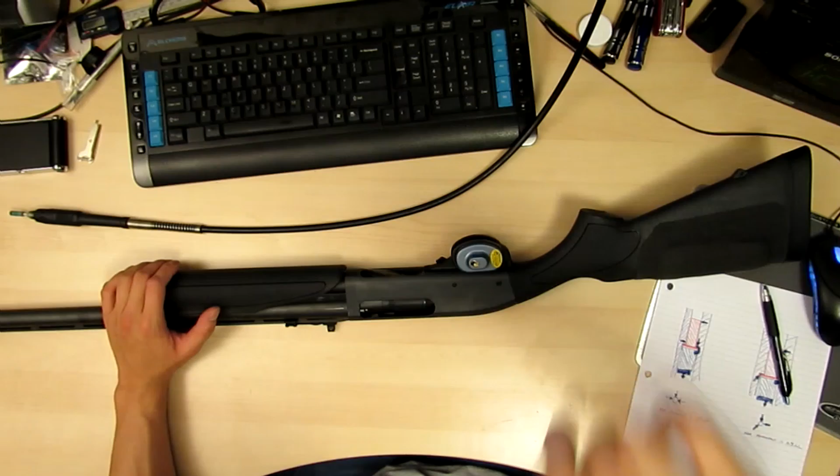So if you're watching this video, you probably want to find out how to fix your Remington 870 pump action shotgun from jamming. After a shot, you don't need to push this, but you should be able to pull the shell out. But sometimes it'll get stuck and you'll have to reef on it a bit, you'll have to jiggle it around, or you'll take the butt stock and just hang on to the grip here and just smash the butt into the ground. And that'll loosen it up. And I'm going to tell you why that occurs and how you can fix it.

If you've got a problem with a jamming 870, just take an empty shell, squeeze it into 4 corners, throw that in there, and it should not be able to come out. If that's your problem, all you have to do is sand the other side down and then polish it off, and it should be able to open up even if you've got a pretty messed up shell.

So I've narrowed the problem down to a little bump, manufacturing defect I guess you would call it, but a bump that's left there after poor machining of the breech right outside the chamber. And what that causes is after you've fired a round and you've had a shell expansion, that's just the plastic part expanding out here, not the brass rim. The shell expands, catches onto the edges here, and causes the rim to push up against this little bump. That's why it doesn't happen every time.

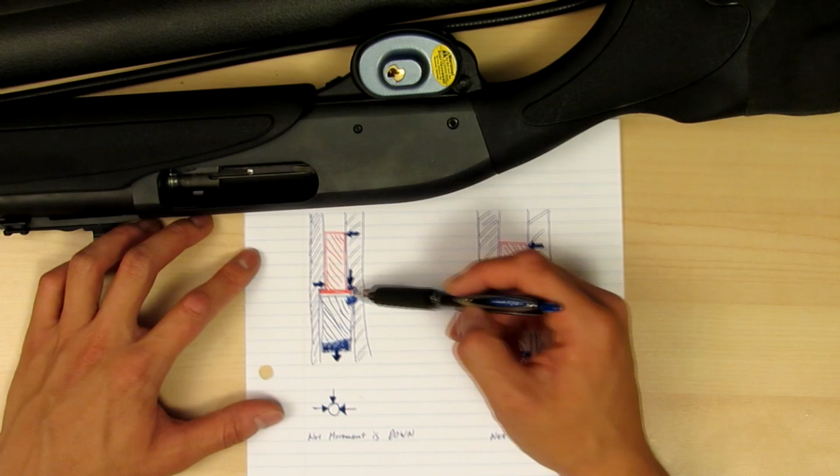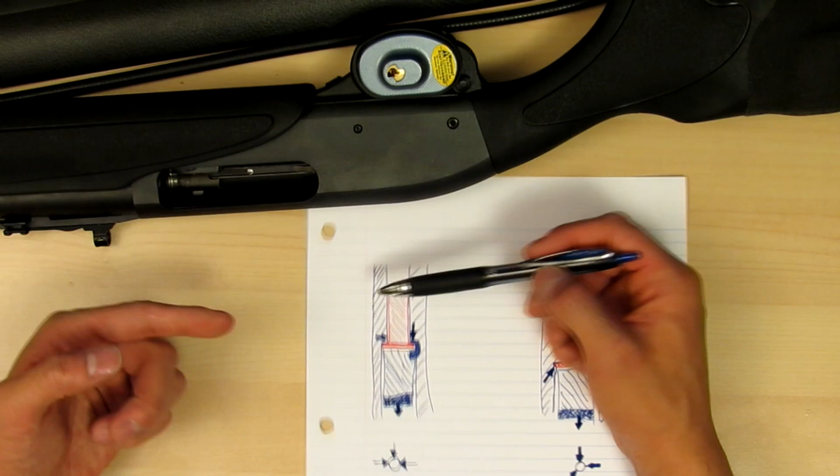You've got one extractor on one side of the rim, you pull on that, and the only forces that should occur are this top edge pushes in and this bottom edge pushes in this way. So there's no forces keeping it from sliding out, so it just comes straight out. If you have that bump there, that little bump pushes up against that, and the harder you pull on the extractor, the harder it forces the rim into the bump cavity, causing it to jam, because that force will cancel out your pulling force. So no matter how hard you pull, that bump's going to push back at you even harder.

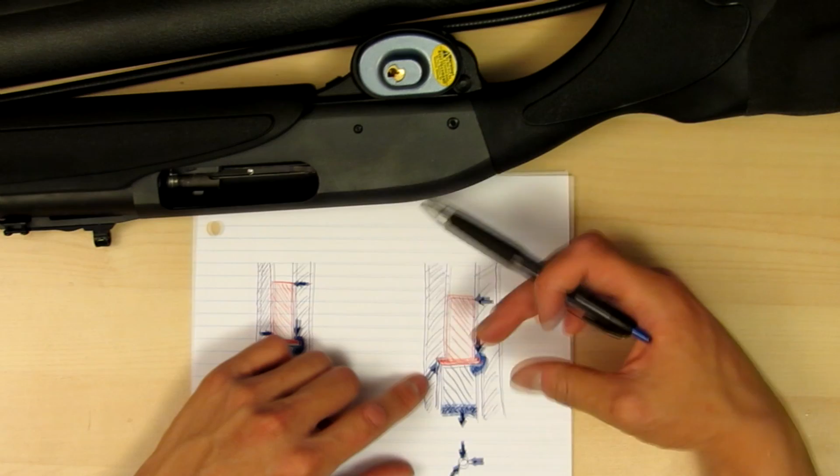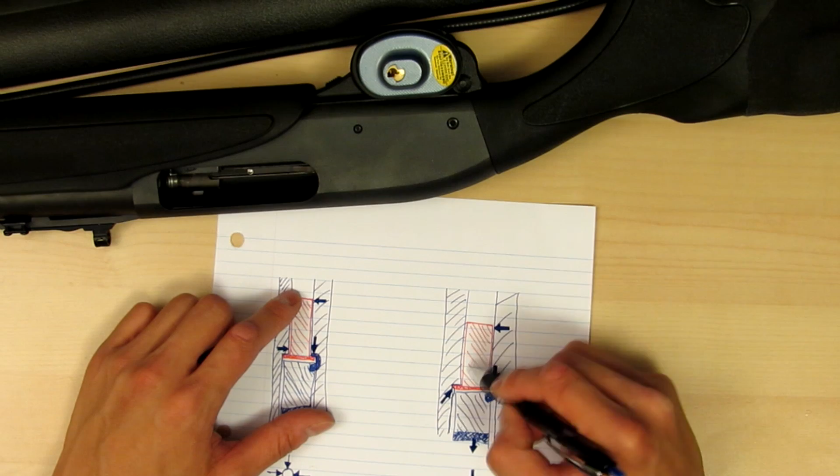And if this shell expansion up here causes the shell to get stuck, it's like you're holding it at the top. When you pull on the extractor, it pivots the shell and the rim pushes up into that little cavity and the rim gets jammed up against the bump. So when you pull back on the bolt, it just won't pull it out. So get rid of that bump and it'll slide out every time.

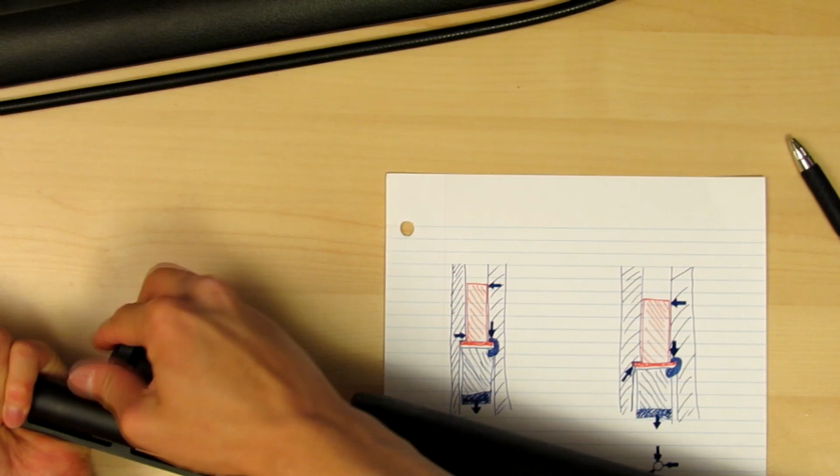And this is the reason why dual extractor shotguns are better, like the Mossberg, because if you've got 2 extractors pulling on it, there's no way a bump in the breech can cause anything to happen like that.

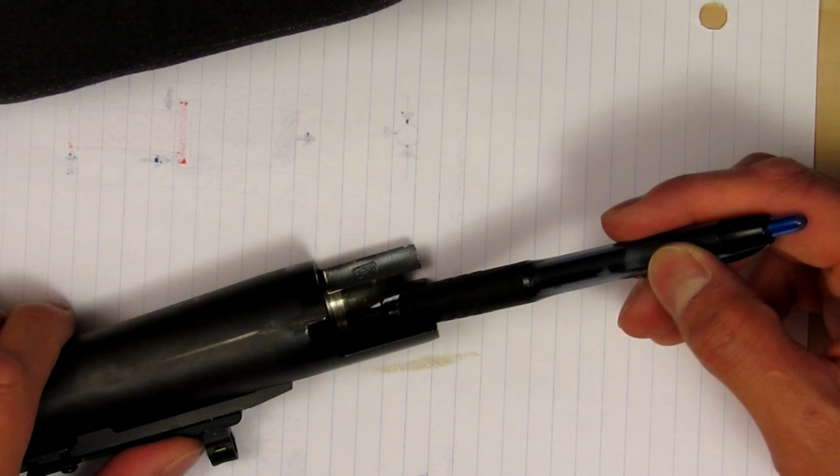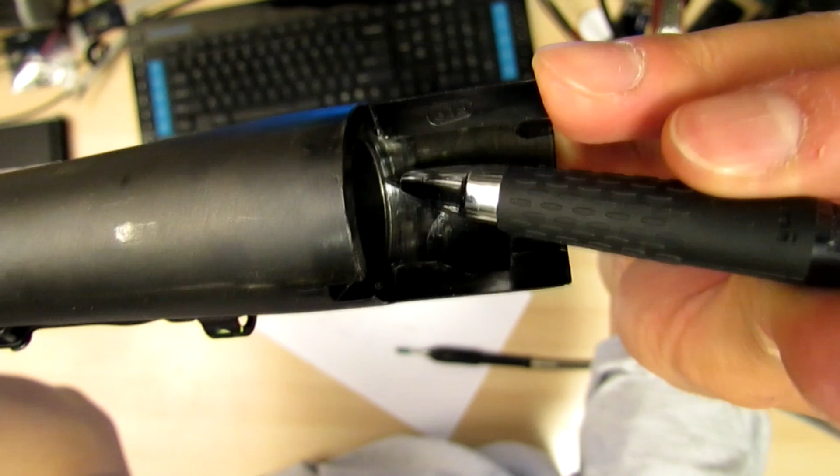So if you take a look here, if you run your fingernail along that edge going out, you should feel a tiny bump. So in this close-up shot, you can see that there's actually contours there, and that contour is what the bump is. So just keep grinding away at that contour and make sure that bump isn't there, because the extractor is on the opposite side, so it's going to cause it to bind.

Now if the polishing wheel isn't enough for you, you can take a grinding wheel or a sanding wheel. Not so much a grinding wheel. Yeah, that's a little too abrasive. Take a sanding wheel and polish out that little nub. Don't try to go too far. You want to leave something there. Alright, so once you've sanded that bump out of there, take your polishing wheel and polish it up, just to make it nice and smooth.

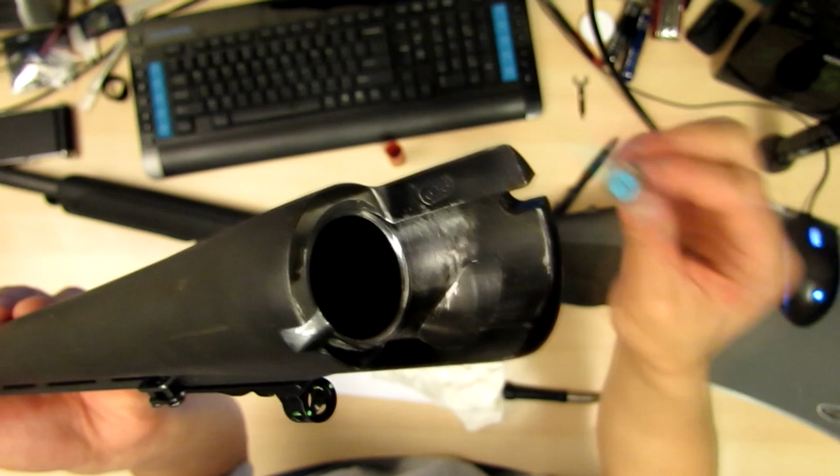Alright, so with the sanding wheel and then the polishing wheel, I've gotten the bump out of there and smoothed it out. So now if you take your fingernail and run it along that edge and pull back on it, it doesn't catch. That's how you can see if there's any bumps and stuff. So let's put it together and test it out.

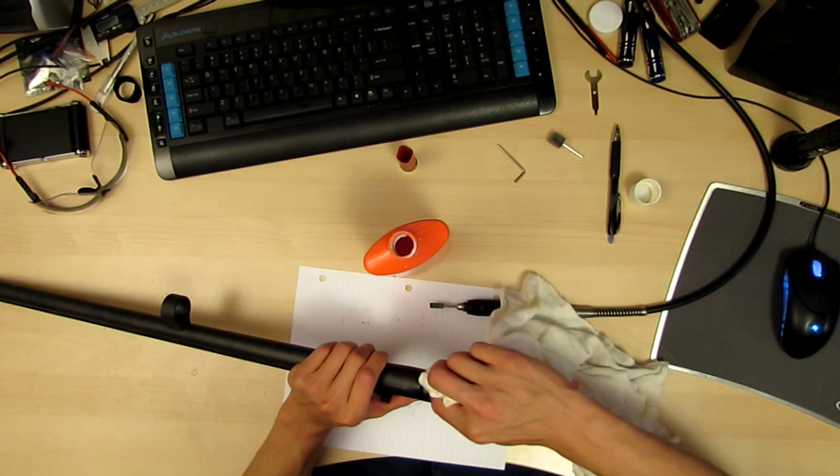Oh yeah, and after grinding off the bluing, you might want to use some new finish. I find that its anti-corrosive polymers are pretty good. You put zinc polymers in there, so it stops corrosion by using cathodic protection. It's pretty good for even the whole outside of the barrel because the bluing doesn't always stop rust, and the extra coating of zinc polymer helps it out. So just put that on there, let it dry, and then wipe it off, and that'll keep it from rusting.

This is also a solvent for oxidized materials, so any oxides it can take right off. So if you have any rust on your gun, you can take this and just rub it and it'll take the rust right off. It's pretty much like soap for rust.

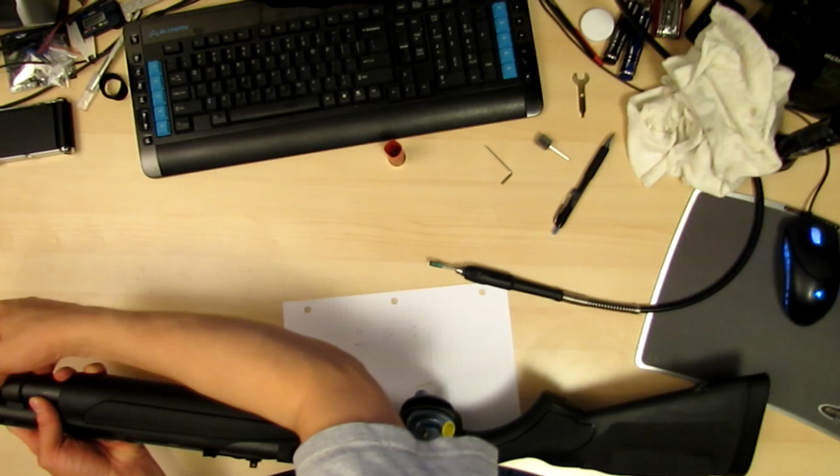Oh yeah, that's smooth. So take your oversized shell that simulates the worst of the worst shell expansion. Load it in there and then slowly pull it out. Should come out no problem. So there you go. That's how you test for and solve the 870's jamming problems.